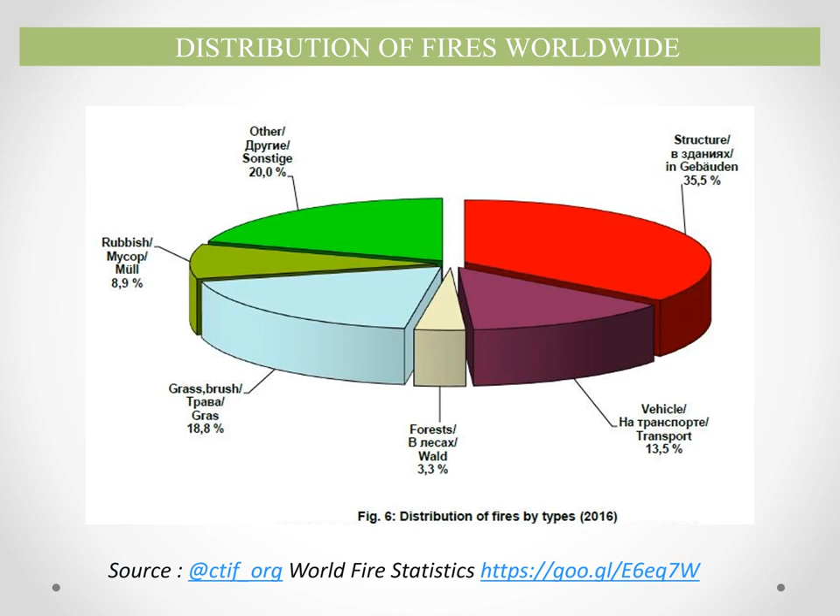The objective of this lecture is to give insight into fire safety in buildings and establish why the role of an architect becomes important while designing the building for fire safety. The figure shows the percentage distribution of fires worldwide by types. Among all the fires, about 35.5% happen in structures. Loss Prevention Association estimates death of 25,000 persons and monetary loss of rupees 2,000 crores worth material and property due to fire.

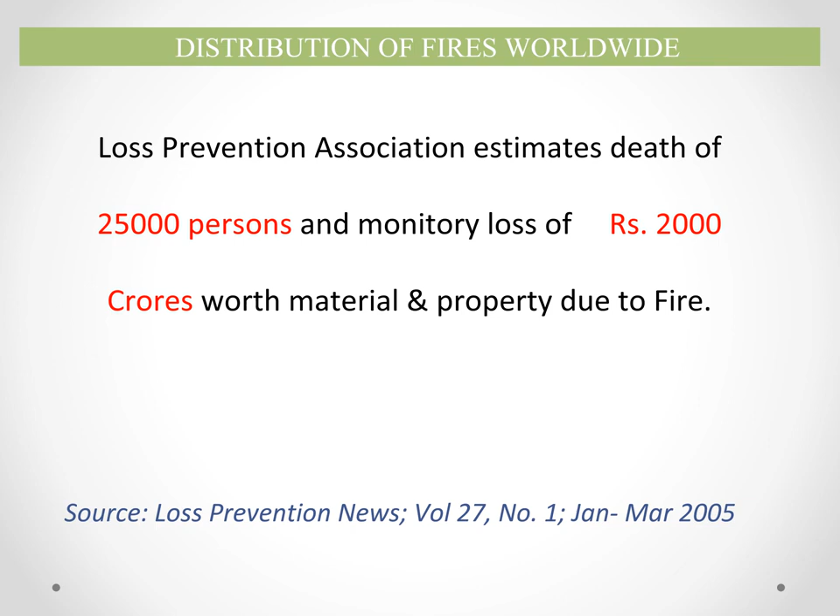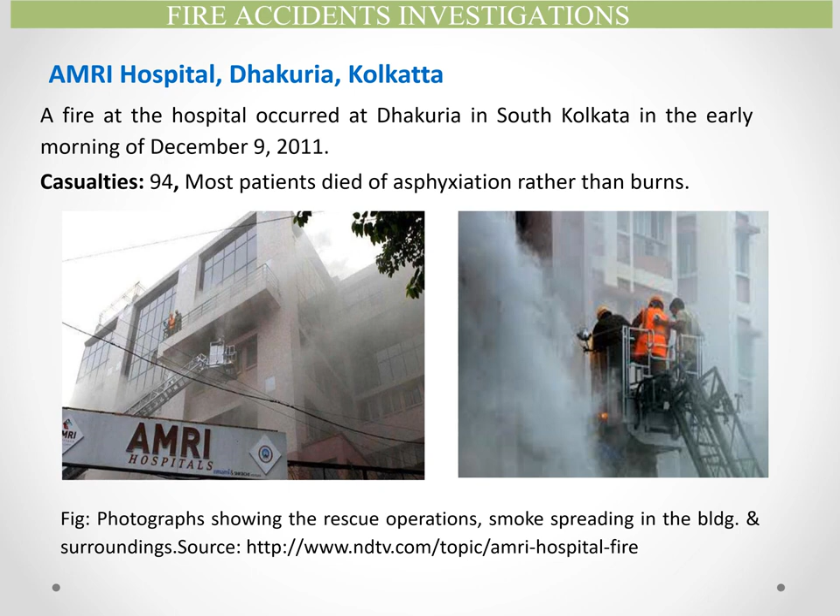World Fire Statistics shows India loses about 25,000 lives annually to fire, which is highest among the countries. This establishes the fact that more attention is required in the area of fire safety in buildings. Fire accidents investigations. In the fire incident of AMRI Hospital, Kolkata, the patients could not escape the building due to the smoke spread in the building. In the fire incident of Sri Krishna School, Kumbakonam, Tamil Nadu, the materials used for the thatch were the reason for the number of deaths. Thus, investigations prove that among the various reasons of loss of life and property in fire incidents, building design had a major role to play.

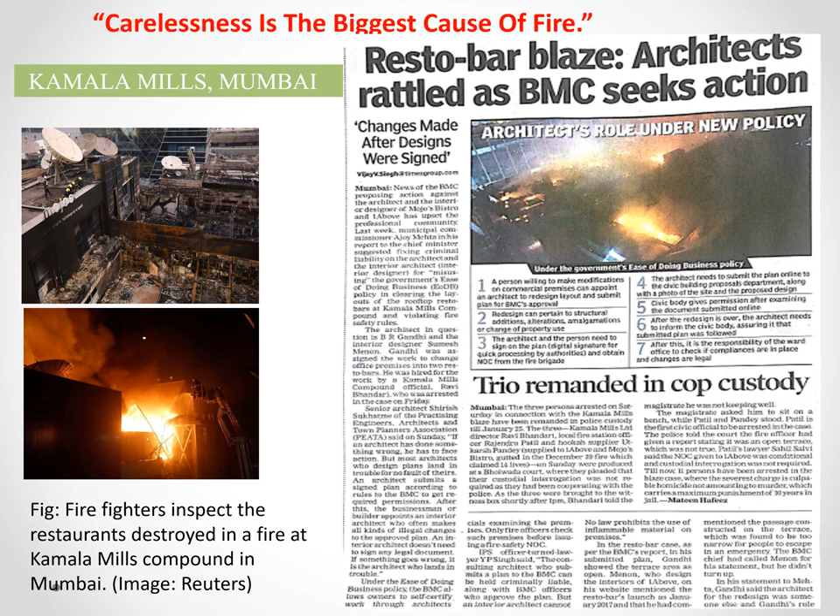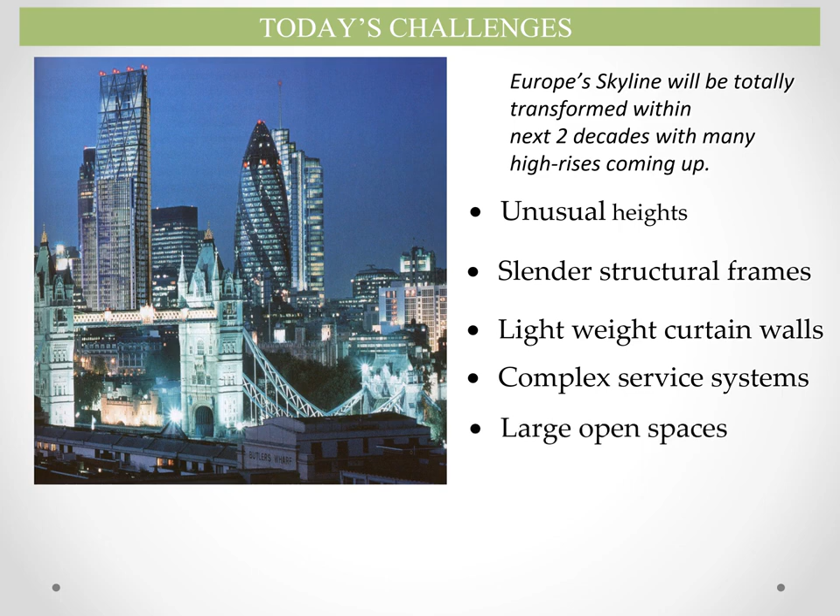In the Kamala Mills fire incident, the office was converted into a restaurant. The architect and interior designers were booked for violating fire safety rules. Contemporary buildings have many such features which, instead of contributing to containment of fire, add to its spread, like unusual heights, slender structural frames, lightweight curtain walls, complex service systems, large open spaces, use of combustible materials, large closely spaced windows, etc., which make them more vulnerable to fire. Fires that are small soon will be tall. The figure shows the 4 stages of fire development where active and passive fire protection measures will play an important role during development of fire.

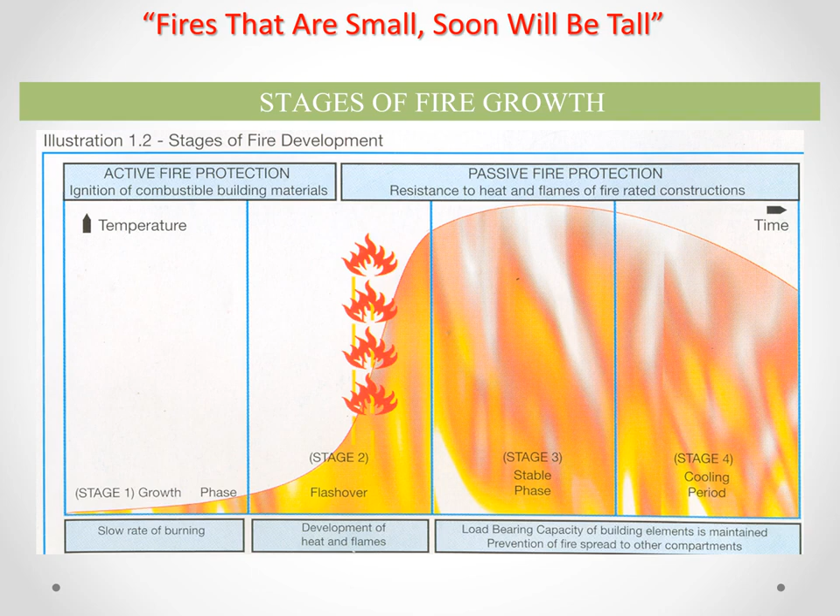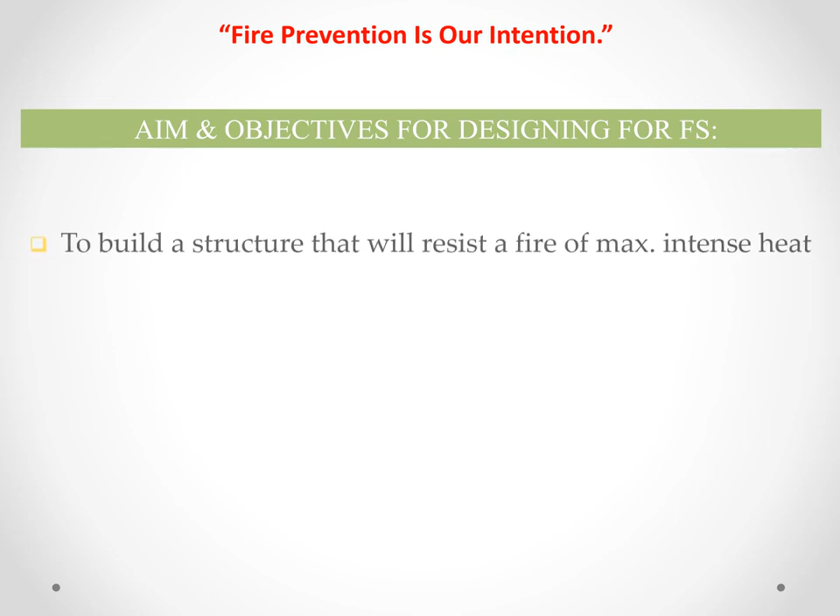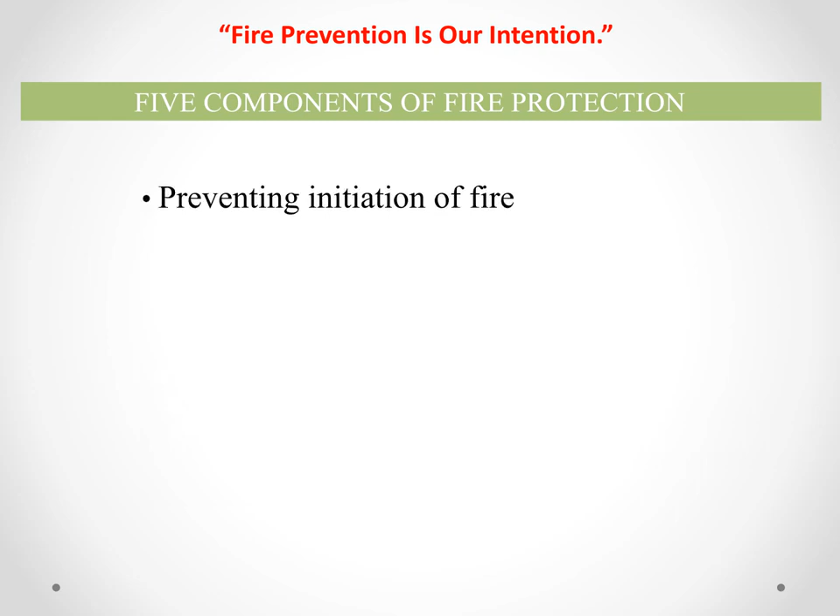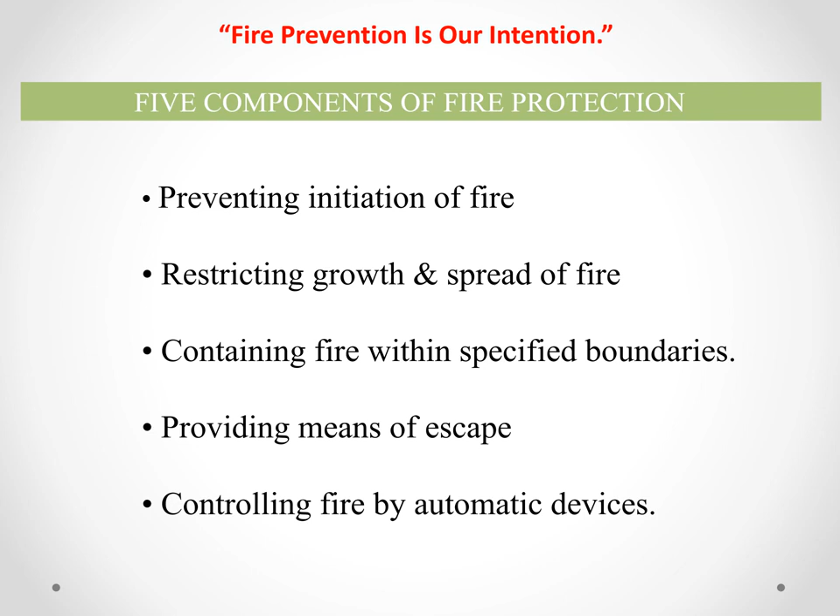Although architects are not trained as fire scientists, it is important for them to be aware of the fundamental principles of fire safety. Fire prevention is our intention. So, the aim and objectives for designing for fire safety should be to build a structure that will resist a fire of maximum intense heat and does not collapse until the occupants safely evacuate the building. The 5 components of fire protection for designing for fire safety are preventing initiation of fire, restricting growth and spread of fire, containing fire within specified boundaries, providing means of escape, and controlling fire by automatic devices. The architect needs to have vision to see beyond and critically consider the building design in relation to the possibility of fire.

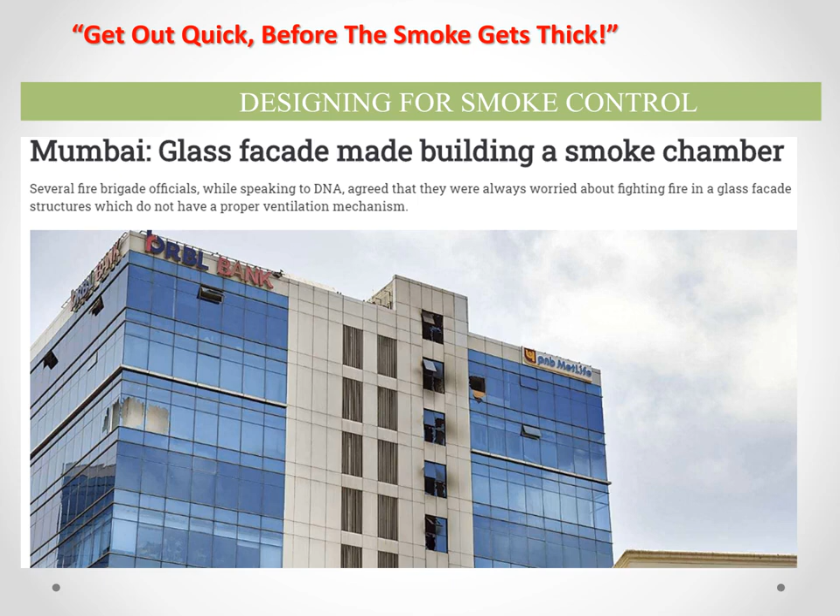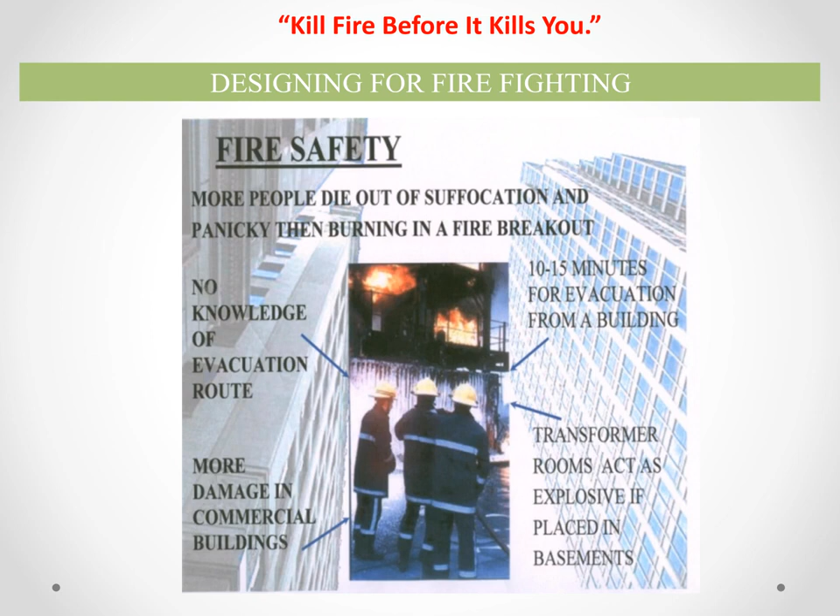Designing for escape. The escape routes are another such important design decision which can prevent panic and help in easy evacuation of people. Designing for smoke control. Most of the deaths in fire are due to smoke inhalation and not due to burning. Smoke has carbon monoxide, which is very dangerous, and it causes disorientation and loss of breath. There are many design features which add to the problems of smoke spread. Designing for firefighting. Firefighting is done to evacuate the people trapped in a burning building. Many times design features such as false walls, usually provided for aesthetic reasons, become a hindrance in firefighting.

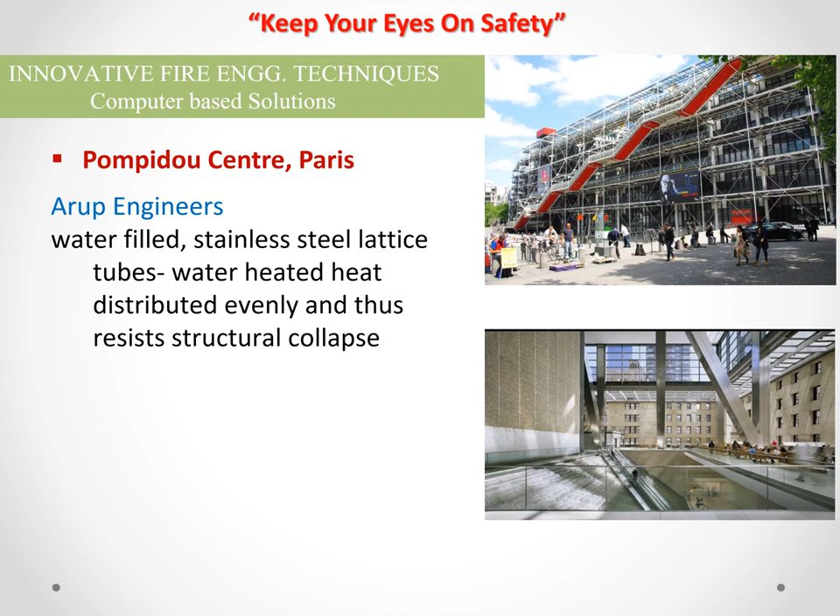Innovative fire engineering techniques. A well executed study and willingness of fire officials to work with architects can give workable solutions without compromising freedom in designing. The first green high rise office building to be completed in New York City, Hearst Tower, accurately represents the talent and intellect that drives Foster and Partners towards innovative and groundbreaking design. In the atrium, which features escalators running through a three-storied water sculpture titled Icefall, built with thousands of glass panels, it cools and humidifies the lobby air.

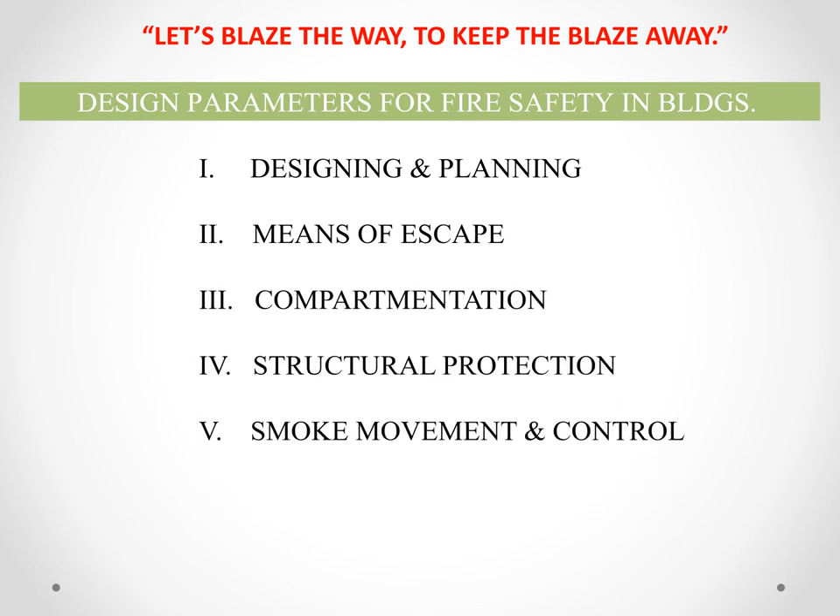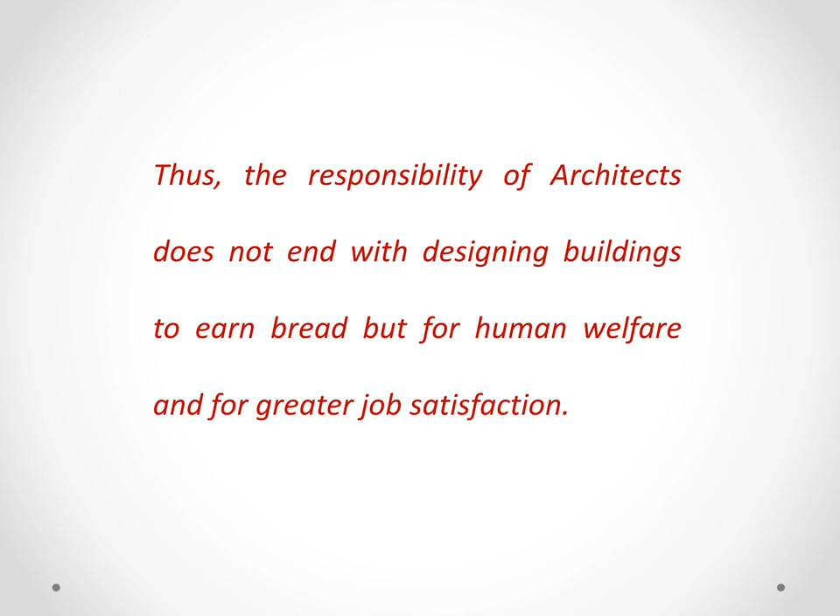Fire safety is a subject related to design, planning, and operation of buildings for human safety through fire prevention and management. So, the design parameters for fire safety in buildings are designing and planning, means of escape, compartmentation, structural protection, smoke movement and control, and firefighting. Thus, the responsibility of architects does not end with designing buildings to earn bread, but extends to human welfare and greater job satisfaction. Thank you.